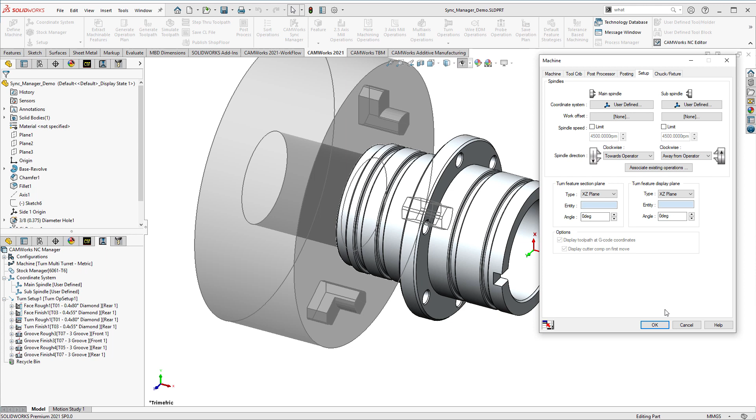In CAMWorks 2021, mill turn machines have got even simpler. You can see for any lathe or mill turn, we can now pick the spindle direction with ease, whether it's towards the operator or away from the operator for clockwise or counterclockwise rotation.

Moving from there, we've also got some great new features in turning. In CAMWorks 2021, we can now do simultaneous tilted turning, and this can be seen by this first operation. By default, you'll just cut it normally, as you can see in the simulation.

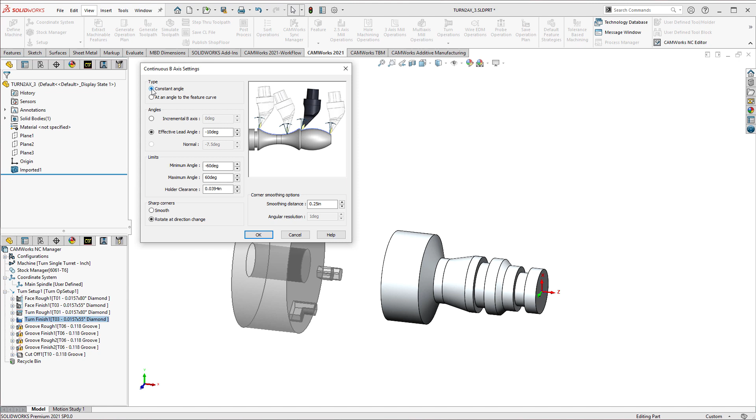But now in turn finishing, we can now pick continuous B-axis movement if your machine accommodates this, and we can use either a constant angle or an angle at feature curve, keeping the cutter normal to the machined part.

You can see as I select this and go to simulate now, it will simulate with the tilting, and if there's any collisions that may occur, CAMWorks will automatically take these out and tilt only the required amount.

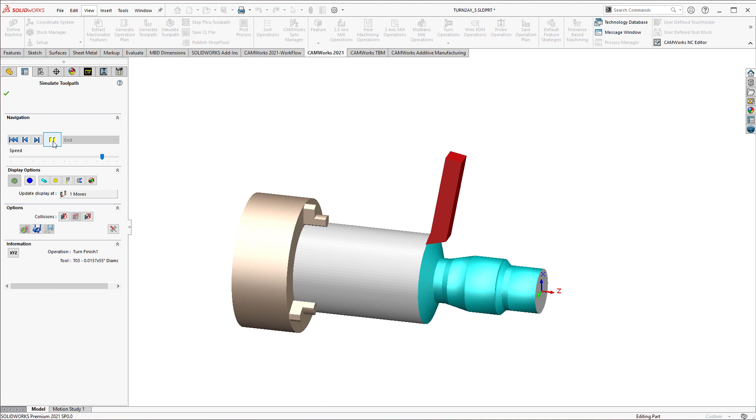Another great addition to CAMWorks 2021 is updating of the sync manager. As you can see, there's two rectangular grooves in my feature tree, and I've made two groove roughing and finishing operations which use an upper turret and a lower turret.

As you can see, at the moment these are simulating one at a time, but actually on the machine these could be done together, so this is a perfect operation for the sync manager.

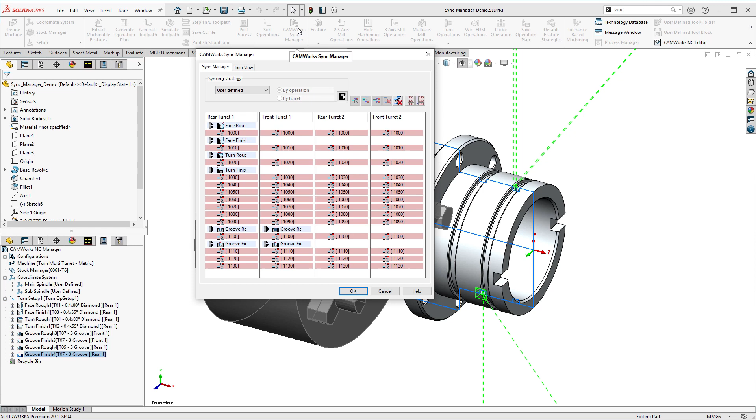I can get the sync manager from the CAMWorks tool tree, and you can see here straight away I've got two options. I can delete wait codes if they're not needed, and I could pick if it's a user defined strategy, or I could do it on an op by op basis, depending on which I would like to do.

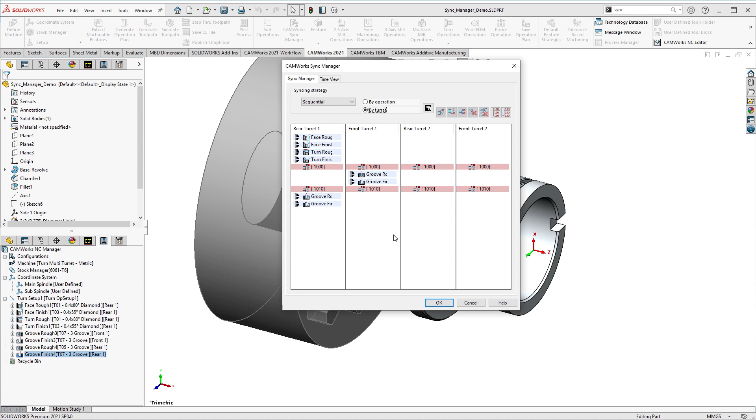So going to sequential, it'll reorder my toolpaths, and from now on I can see what's in the rear turret and what's in the front turret, and I can also drag between the two if needed.

As you can see, I've dragged the groove finish, then the groove rough, and I get a warning message saying the speeds are incorrect, but dragging them into the correct orientation shows me that that will work perfectly for me, and that could now be calculated.

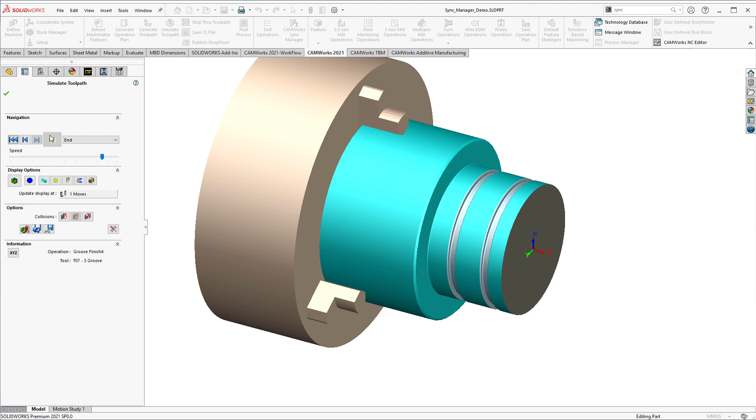Other enhancements to look for in CAMWorks turning in 2021 is prime turning, which will be coming in January. As you can see as well with mill turn, now we can do probing operations on a mill turn part. This is really good if you want to clock up a part for a second time, or even just check the measurements of it.

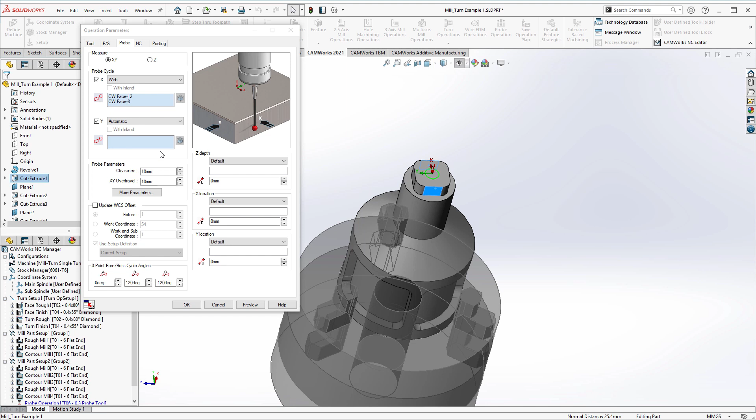As you can see, I can pick a web for this boss on the outside of the part, and we can go and quickly get the needed code for my probe to check the dimensions of this.

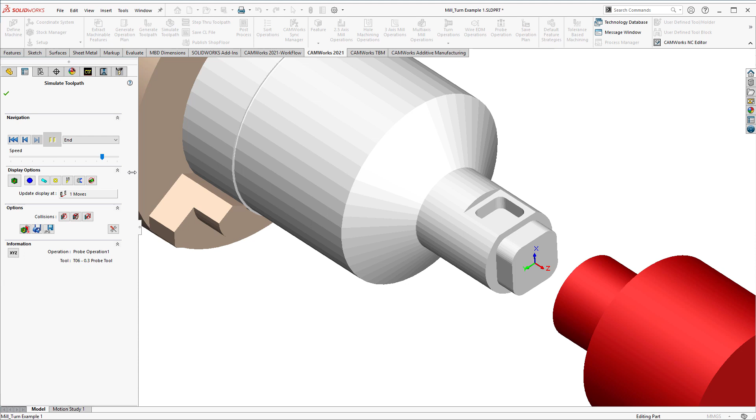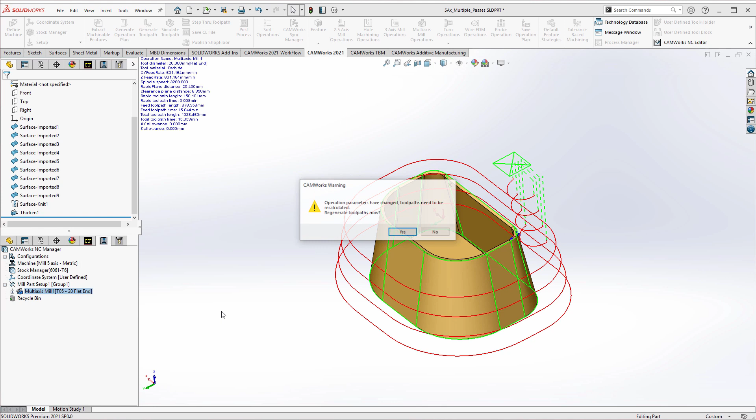Moving on to 5-axis milling in CAMWorks 2021, there's been a really nice feature added to swarf machining. As you can see, I've got my swarf machined part here, and now in morphing operations for the pattern, we can use a spiraling method, allowing reduction in lead-ins and lead-outs, and going up and down from the start plane. Gives you a nice quick toolpath, reducing some of the movement that may not necessarily be needed.

You can also see a great new preview in the step through toolpath, which shows just the tool going round the job.

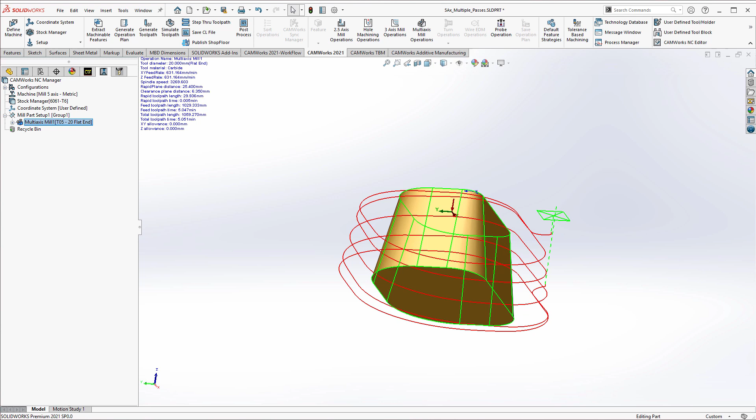Once we're happy with the toolpath, we can also change the arc. In CAMWorks 2021, we have a new arc direction for linking, or entry and retract. This is called the automatic arc.

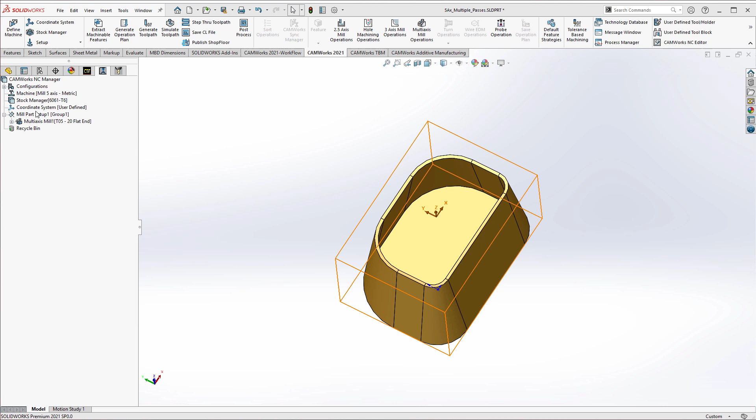CAMWorks will look at your part and the stock, and look at the best way it could enter or retract from the part. You'll still have the options that you had previously, but it's a nice quick way to get something that will lead straight on to the machined part.

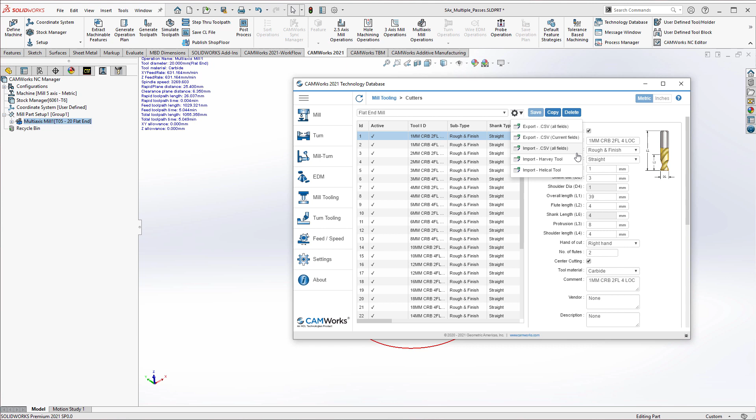Finally, a nice little addition to the technology database now allows us to export tool cribs as we see them. So you can see as I've come into the tool crib, I can go and export these as a CSV, so you can straight away put these into Excel if that's needed.